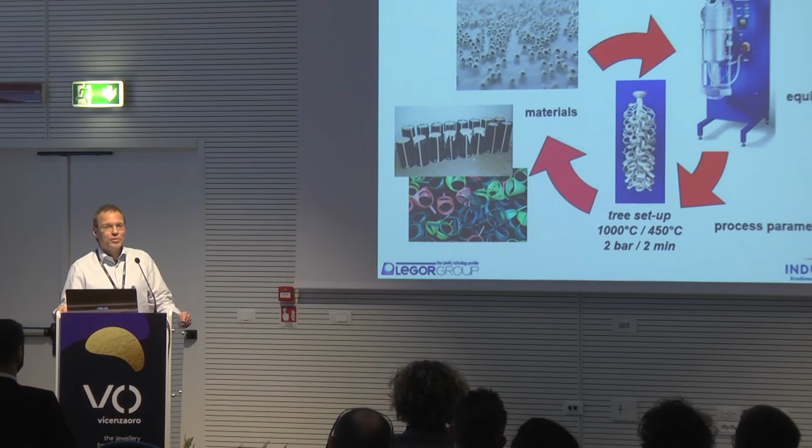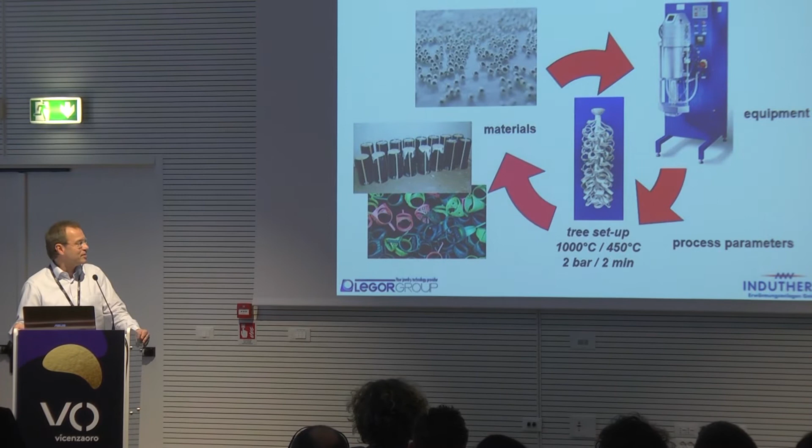The complexity of the casting process is well known, I guess. It starts with the materials that we use - the waxes, the investment material, the alloy. We put it in a casting equipment and run the process using a set of process parameters. All these aspects interact with each other in a complicated way during the casting process, so chasing the source of defects is not always so easy - which is what we have to do if we want to be economic and increase the quality of our products.

Now we will entirely focus on porosity, and it's about differentiating between different types of porosity. If you want to avoid porosity, you must identify different types of porosity. You must understand the characteristics of them and the major reasons before you can tackle them and try to avoid them in the daily routine. So this will be the sequence that we will follow.

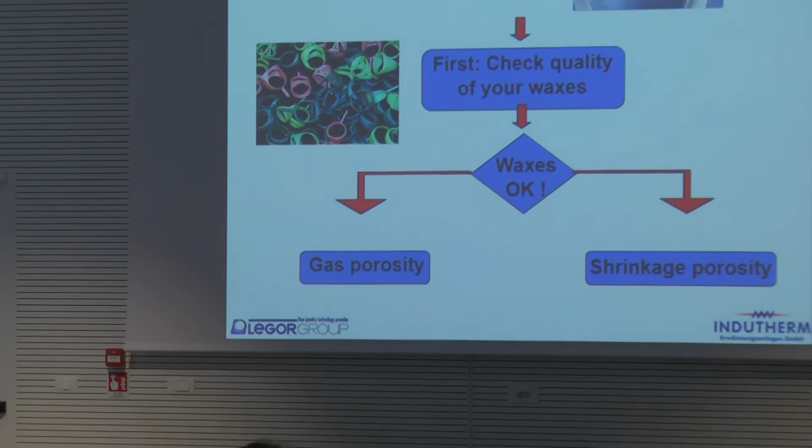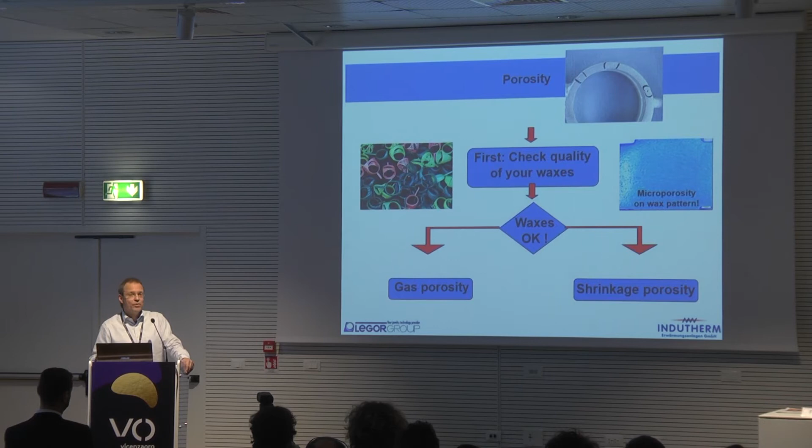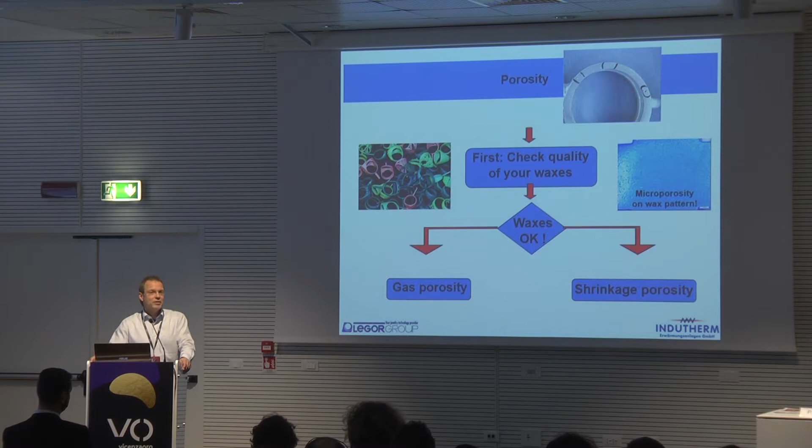First of all, a general comment: if we talk about porosity and pinholes on an as-cast surface, in many cases we can trace them back to wax defects. So the first recommendation will always be - if you have issues with porosity or pinholes on your surface, check the quality of the wax. In many cases we can find porosity already on the waxes - it can be micro pores, as seen on this photo, it can be bigger pores. Also resins that are now generated by the printers out there can have defects. So check the quality of these items before you go into the casting process later on.

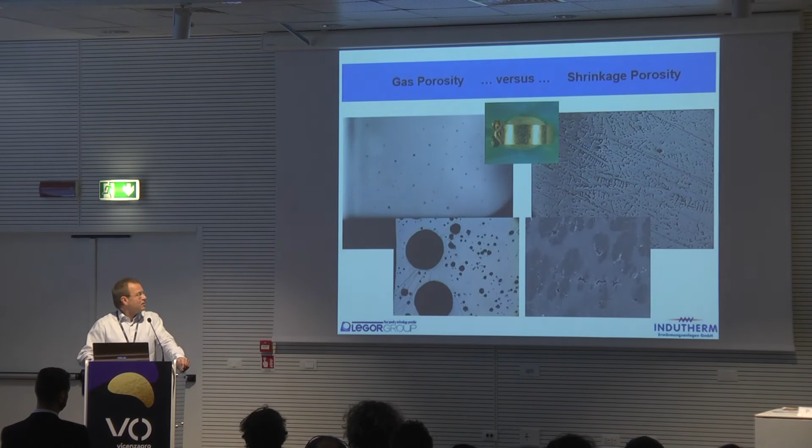Differentiating between two main types of porosity is important. In general, we have two different types: gas porosity characterized by spherical pores, and irregular shaped pores like on the photos on the right side, which we refer to as shrinkage porosity. These are the main two types of porosity that we can find. They will interact and overlap in the real world, but it's good to differentiate them clearly here for today.

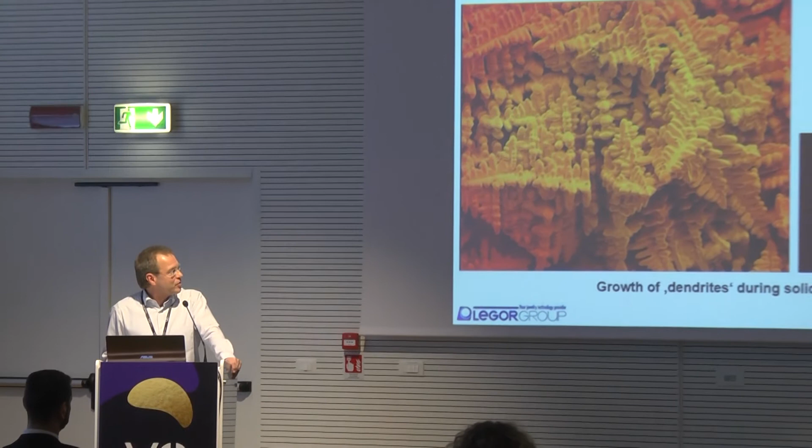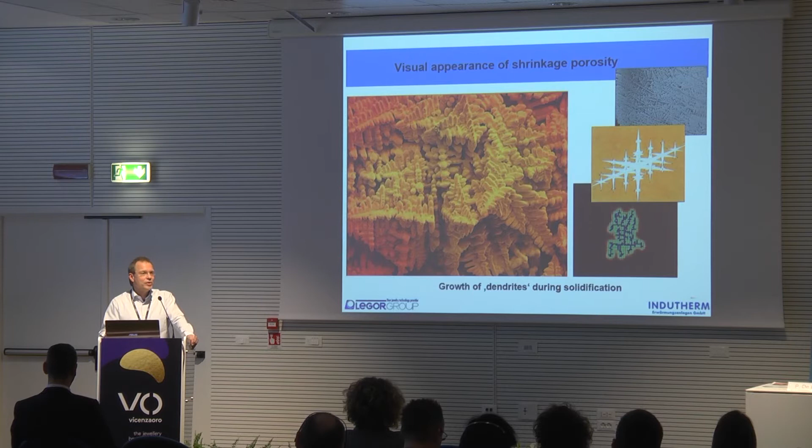In jewelry casting, the porosity will be distributed in a different way, or in any casting process that involves more complex solidification processes. So the irregular shape that we see in shrinkage porosity items is related to the way the crystals grow, like the branches of the tree that you can see here on this photo. When these branches of the crystals grow, the metal shrinks in volume and you will have voids. And if metal can feed these voids, then porosity can be avoided. But if this doesn't work well, as we can see on the right-hand side of the picture...

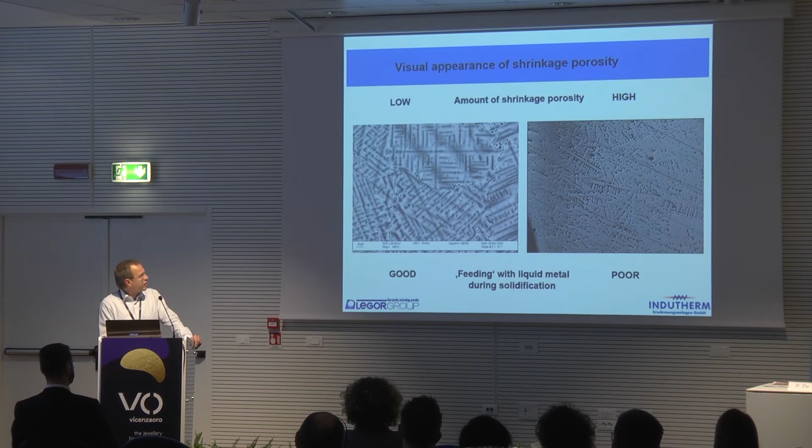If this feeding of these voids doesn't work well, these voids will remain, and we have these typical irregular shaped pores, shrinkage pores. On the left side, you see a micrograph where the microstructure has been etched. We can see also these crystals here. Yes, you can see some microvoids here, but all in all, the feeding went better than on the right side, and we can avoid shrinkage porosity.

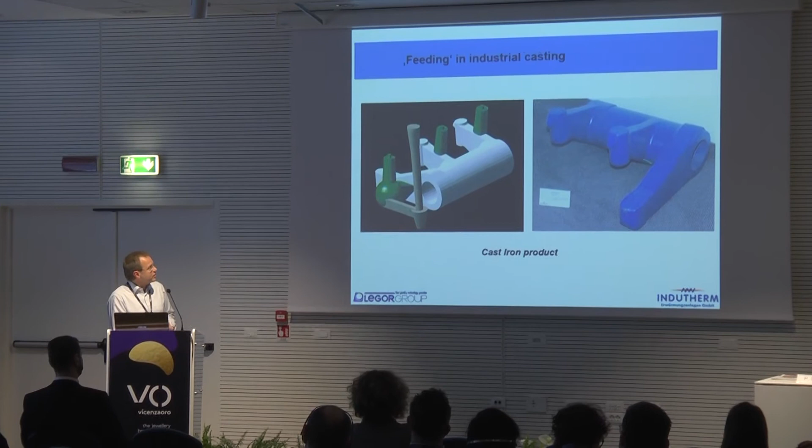So how is this done in practice? In industrial castings, like you can see here, this is the cast that's going to be cast. You see these green items here. These are feeders that are put on typical sections of the cast part, and they will supply molten metal to the casting and feed the casting with liquid metal during all the process to avoid shrinkage porosity.

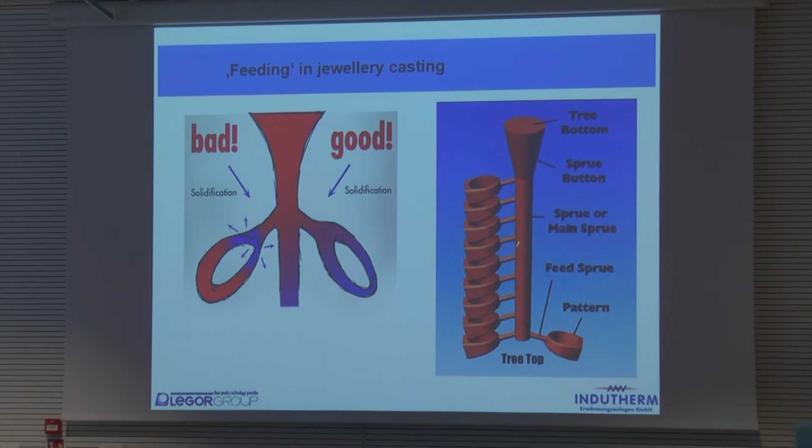In our jewelry casting, how does this work? We have a main sprue and we have gates or feed sprues. The task of these parts of the casting is to supply the molten metal during the filling process. The second task is to feed the solidifying part during the solidification process in order to avoid or minimize shrinkage porosity. So the way of sprueing is very important.

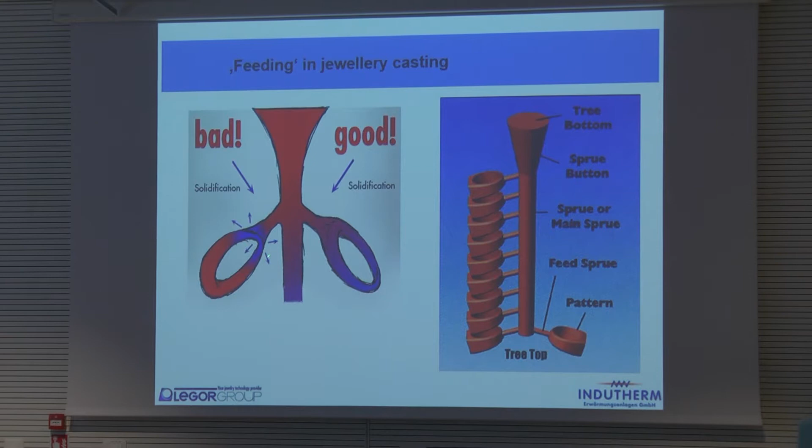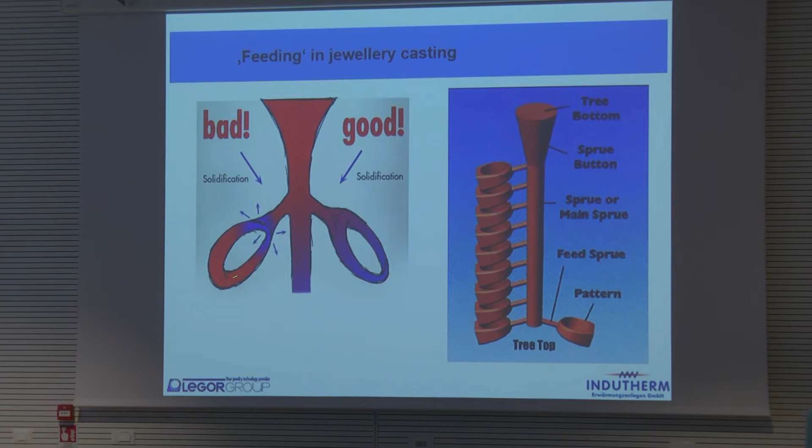Here's just a very generic example. We have a ring and we have a heavy part of the ring here. We put the sprue on the opposite side, and this asks for problem. So this part of the casting may solidify first before the rest of the casting. So when this is solidified, no molten metal can be fed into the other part of the casting. So this will ask for shrinkage porosity in this part of the ring.

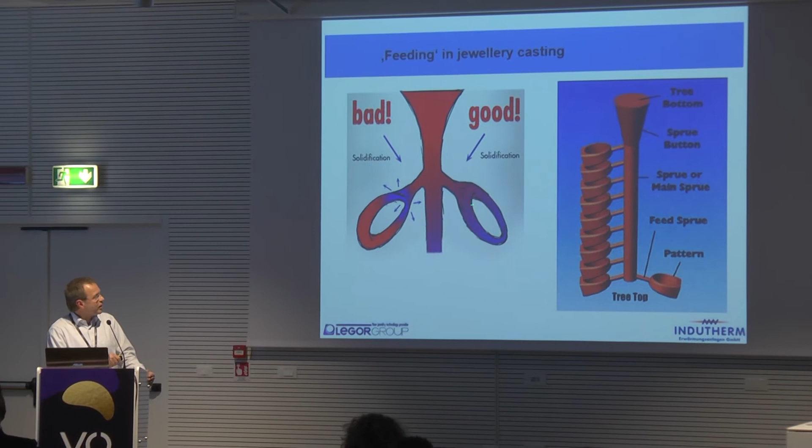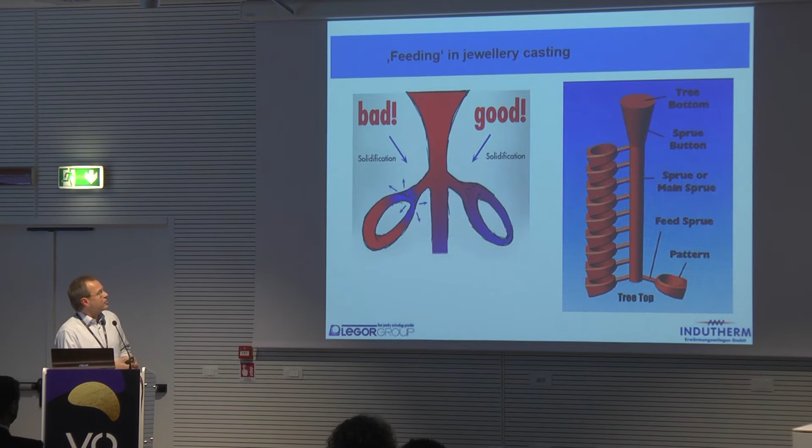Just opposite, if we put the sprue on the more heavy part of the ring, solidification will start here and progress entirely into around the ring shank. So this will allow molten metal to feed the solidifying part of the ring and will minimize, or in the best case, avoid shrinkage porosity.

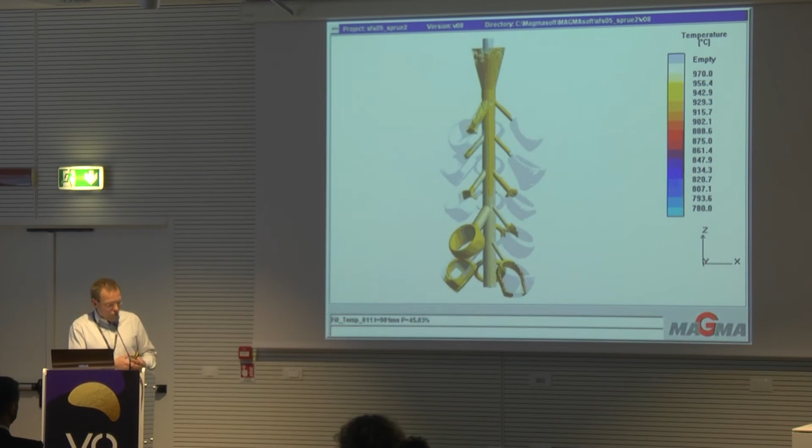Many years ago we focused a lot on computer simulation. So you can see a video here. Let me stop it, yes. So now you've seen molten metal pouring inside. The tree and the parts have completely filled. You can see a temperature scale here, and the metal will start to solidify around 900 degrees. This is an example for sterling silver, and will solidify around 780 degrees.

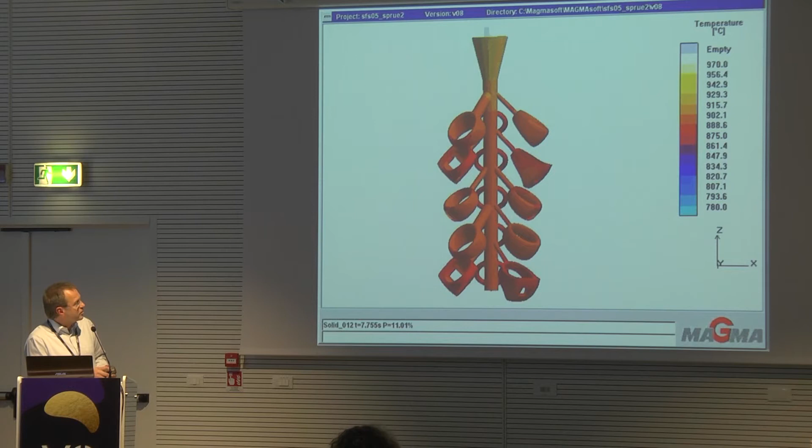If you let the video run, you can focus on some particular points of this simulation video. For example, on this ring here, where we have a tiny sprue opposite to the more heavy section of the ring. I don't know if you can clearly see it now with the illumination that we have here in the room, but you will be able to see that this part will get cold now, so this will ask for shrinkage porosity in this area.

Now, just opposite to that, if you have the sprue thicker, bigger, and more positioned on the heavy side of the ring, this will work much better. Solidification will progress in this way, and this will be the best case to avoid shrinkage porosity.

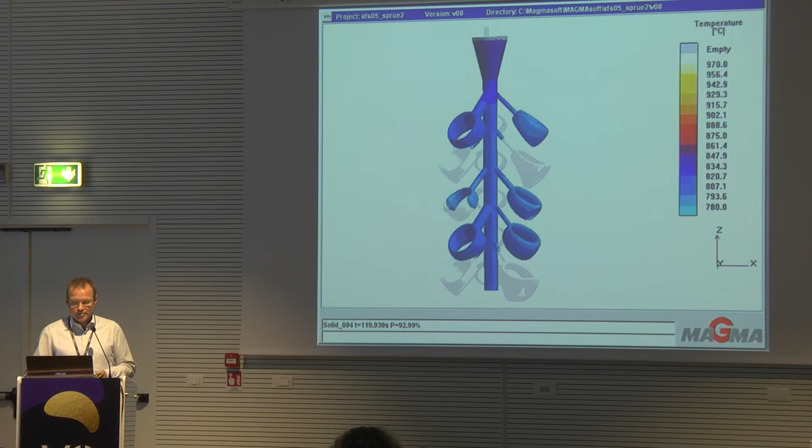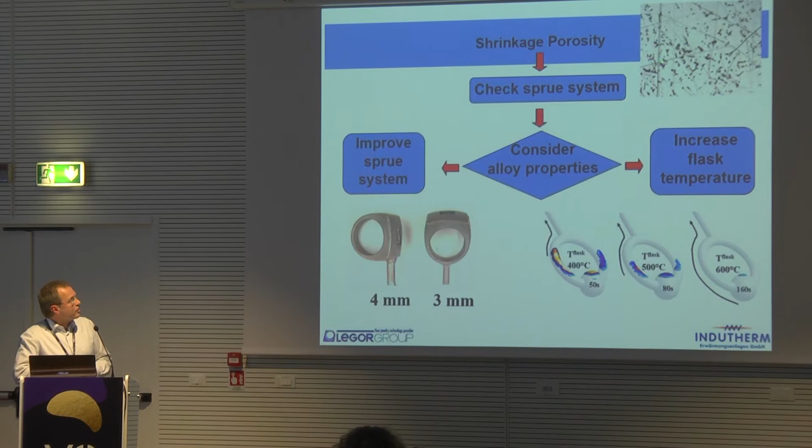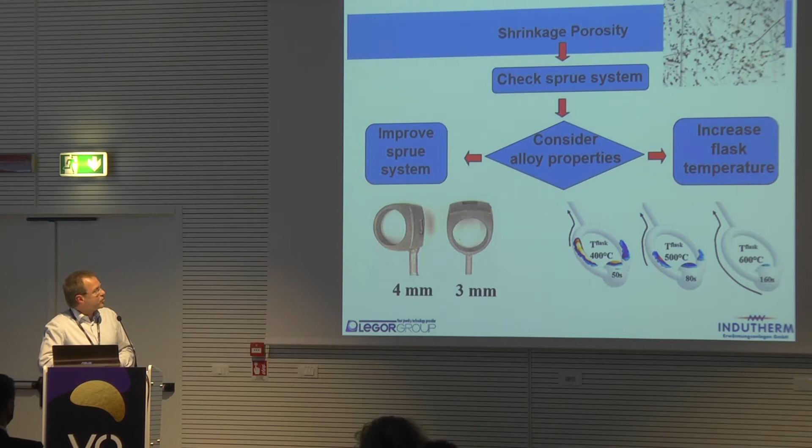So just a guideline, check the sprue system if you can identify shrinkage porosity on the polished surface. Think about the alloy properties - some alloys are more prone to shrinkage porosities than others. Typically, sterling silver is less prone to shrinkage porosity than most gold alloys. Within the gold alloys, the higher melting ones, palladium white golds, are more susceptible to shrinkage porosity. And then the very high melting alloys, platinum or palladium based, are even more critical.

So what can you do? First of all, the best option always is to improve the sprue system. So as opposed to put a tiny sprue opposite to the heavy part of a casting, put a bigger one more near to the heavy part. And this, in most cases, will help to minimize the problem.

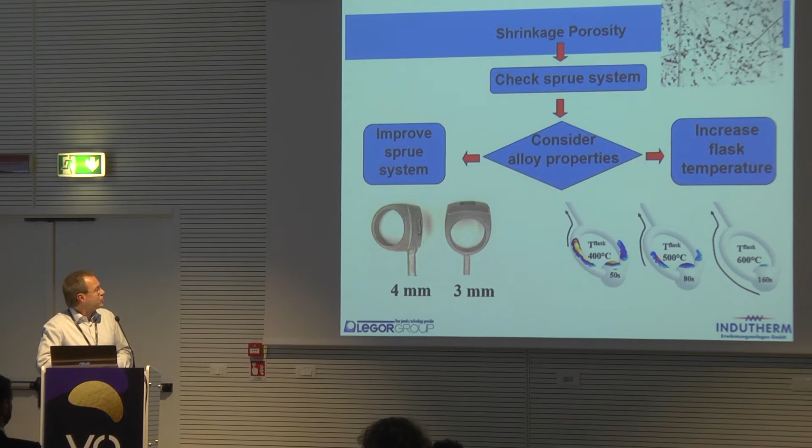The more susceptible the alloy is to shrinkage porosity, the bigger the sprues will become, the shorter they will become, and in extreme cases, we will also use multiple sprues to optimize the situation.

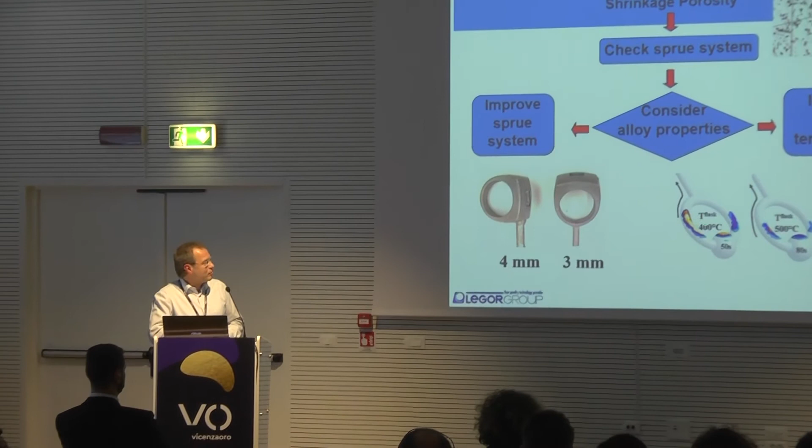Another option can be to increase flask temperature. This is again a result from computer simulation, where we ask the program to simulate the porosity in the casting. You can see a test item here with a heavy section and the feed sprue attached opposite to the heavy section. At a low flask temperature, the simulation, and reality will confirm that, will reveal shrinkage porosity on typical locations. And if we increase flask temperature, the situation will improve.

This is the other way to approach the problem, but you have to be very careful because higher process temperatures are not always the right solution, as we will see in the next minutes. Give me a second.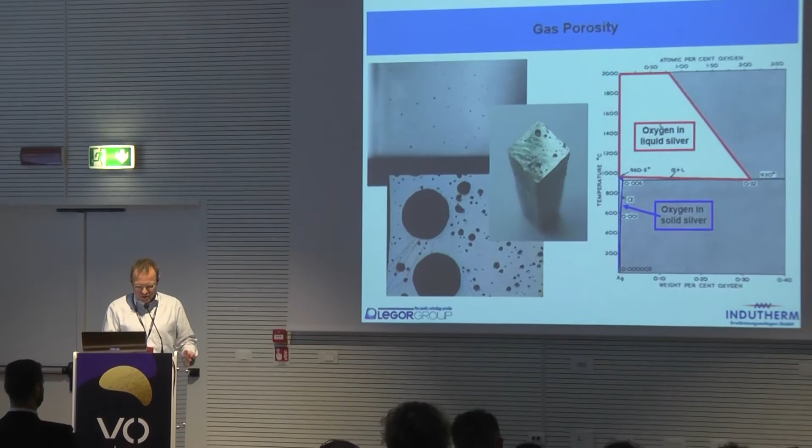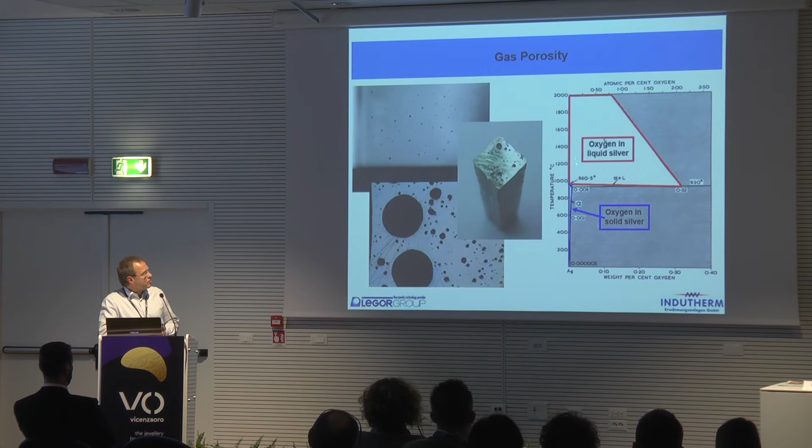We're already coming to the second type of porosity that I want to talk about, namely gas porosity. Again, sterling silver is a good example here because it's very prone to gas porosity. Why? Like all molten metals, you can dissolve a lot of oxygen in the molten metal at high temperatures. This is indicated here by this diagram where you can see the amount of dissolved oxygen as a function of temperature. So in this part here, we are above liquidus temperature of pure silver in this case.

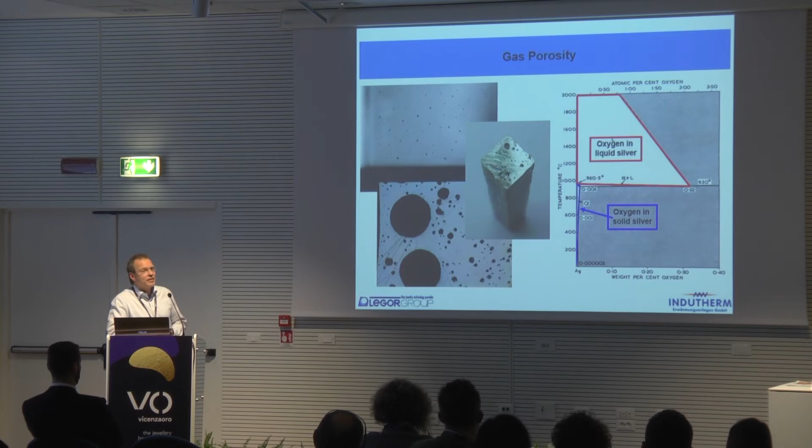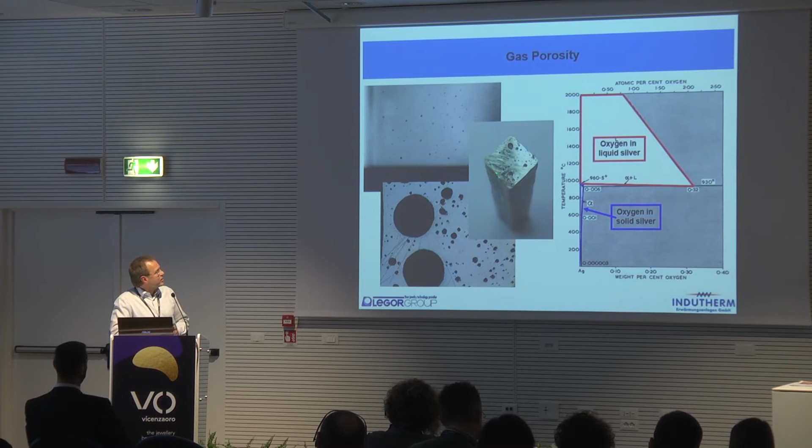This area here indicates the amount of oxygen that we can dissolve in the molten metal. As opposed to that, when the metal solidifies, this small area here indicates the small amount of oxygen that we can dissolve actually in the solidified metal. So what is happening with the oxygen when the metal solidifies? You can see it on this ingot here. The gas tries to escape, and we form typically spherical gas pores.

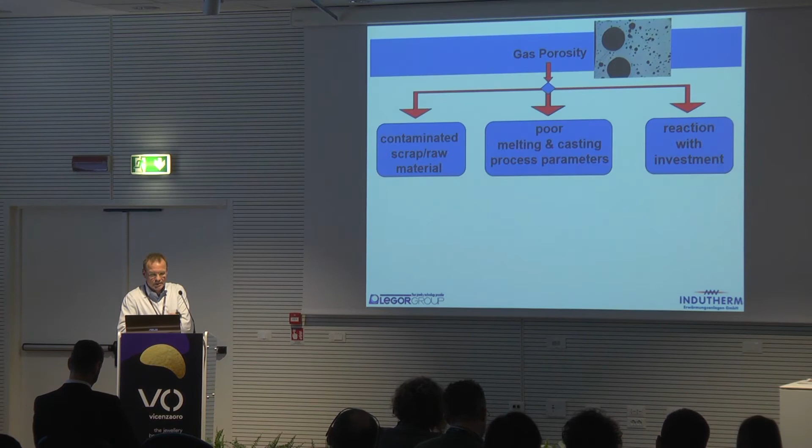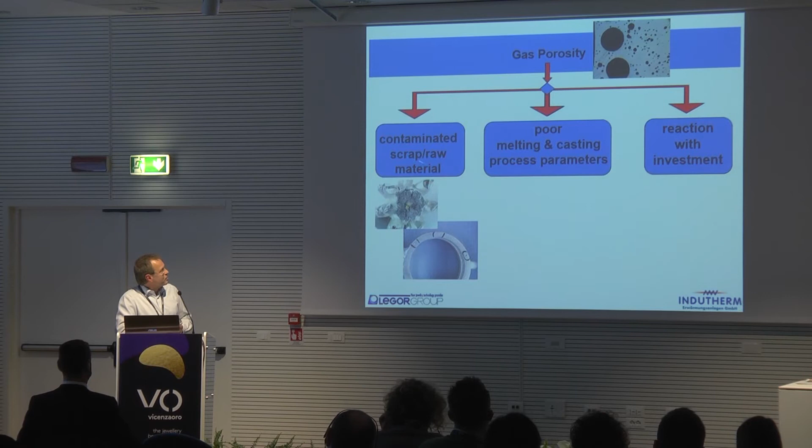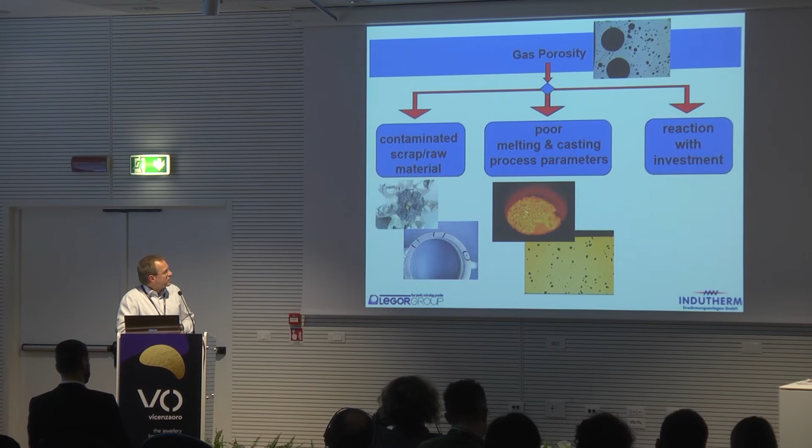How can we try to avoid this? There are basically three categories we will quickly talk about. Contamination of scrap and raw material is a typical reason for gas porosity. Poor melting and casting process parameters is a second typical reason, and reaction with the investment is a main third reason for gas porosity.

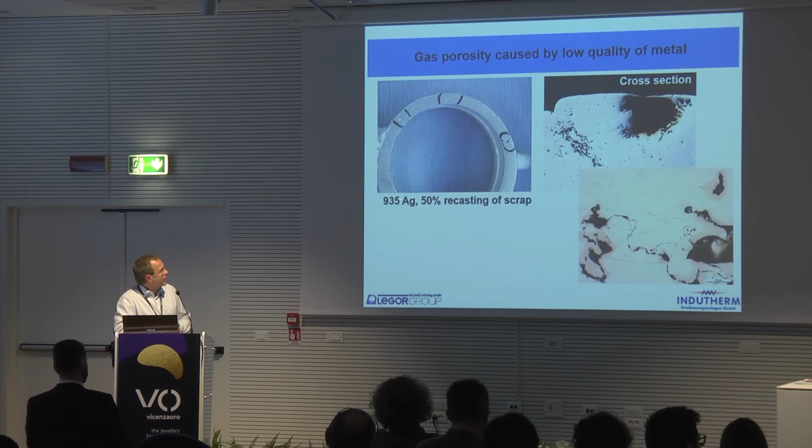Going quickly through these three different options that we want to talk about. Again, a case study here with some big gas pores on a ring shank for sterling silver. If you look with analytical equipment, with a microscope on microsections, we can look into the nature of the defects, and in this case we can see a lot of impurities, oxides, near to these gas pores. So very probably in this case, the defect was caused by the usage of contaminated scrap material.

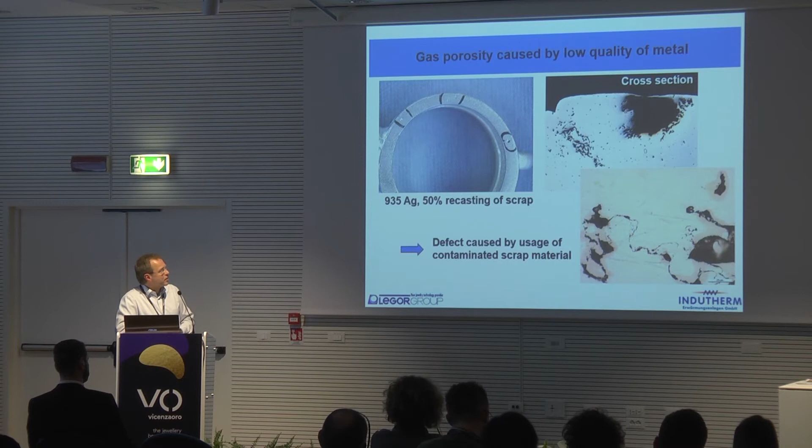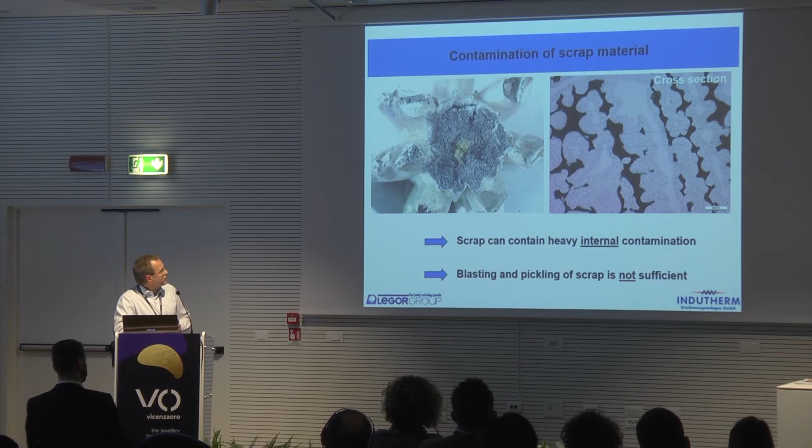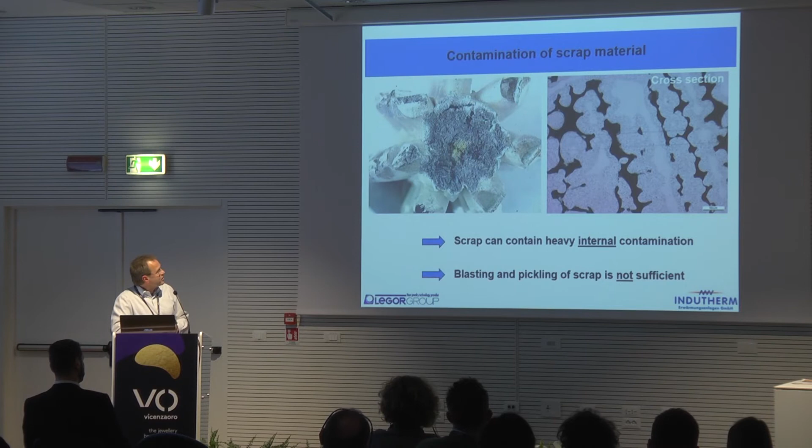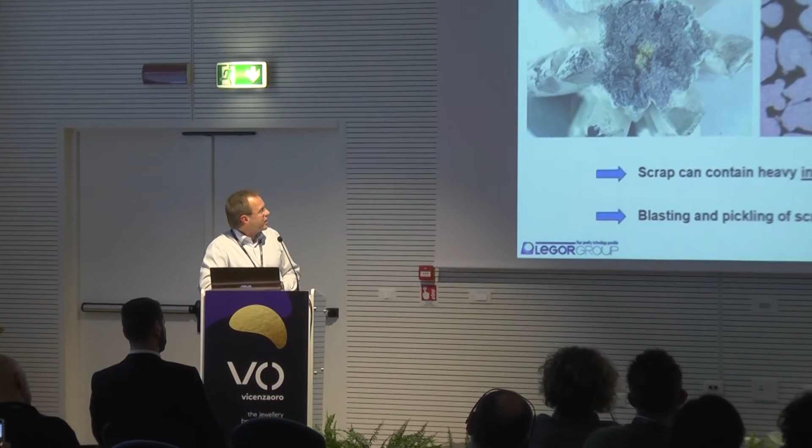Scrap material - I don't know if you can clearly see it on this photo here. This is a tree that has been pickled after casting, where the as-cast items were chopped off here. So these are the remainders of the feed sprues, and the surface of the tree looks shiny because the tree has been pickled. But if we broke up the tree and looked inside the main sprue, you can still see a lot of contamination, dark colors here. So the pickle is not sufficient to clean the sprue after casting. It's an important step, but it's not enough to just pickle the tree or blast it.

So cleaning the scrap is important. We'll always start with the blasting, pickling, and tumbling process so that the sprues are shiny and look clean, but then the recommendation always is to go into a regranulation step, which involves remelting and degassing of the metal, and that will help to reduce the amount of gas that may be dissolved in the scrap material.

It's a process that can be done on dedicated equipment, like a granulation equipment. It can also be done right before the casting process in a casting machine. Typically what we recommend is to increase the temperature 50 or 100 degrees C above the typical casting temperature.

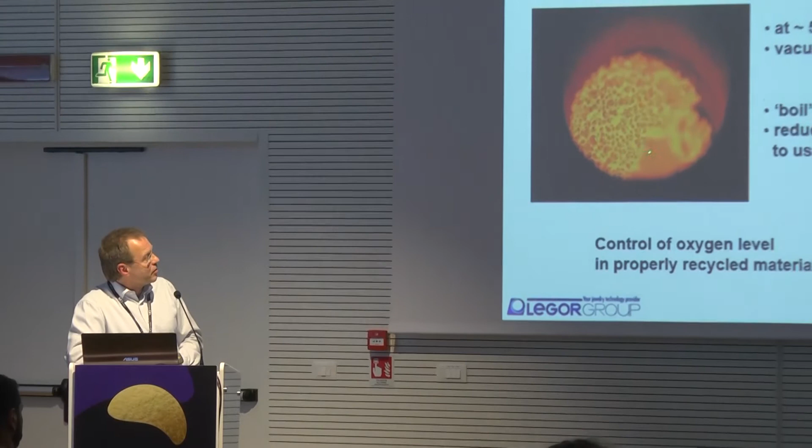The graphite crucible will generate an atmosphere that will take out the dissolved oxygen from the molten metal. Applying a vacuum or an even more reducing atmosphere can also be done on certain types of equipment. We will observe the melt and see the gas bubbling out. Then we can reduce it once the melt is quiet and go to a usual casting or graining temperature.

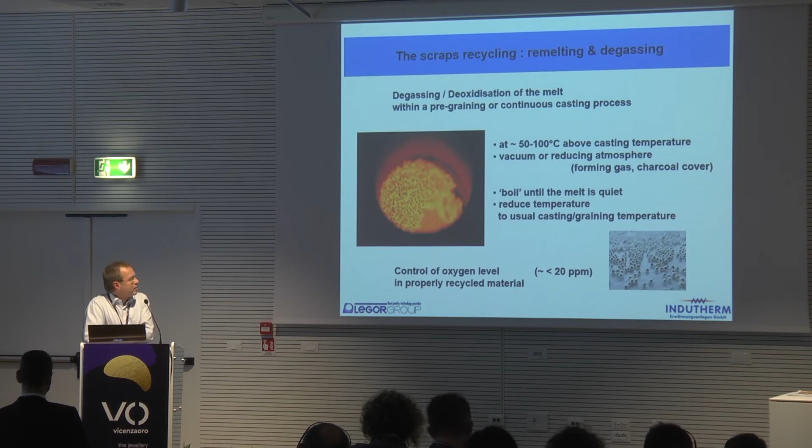So a low oxygen level can be obtained also for properly recycled material, and that will translate greatly into improved quality of the casting.

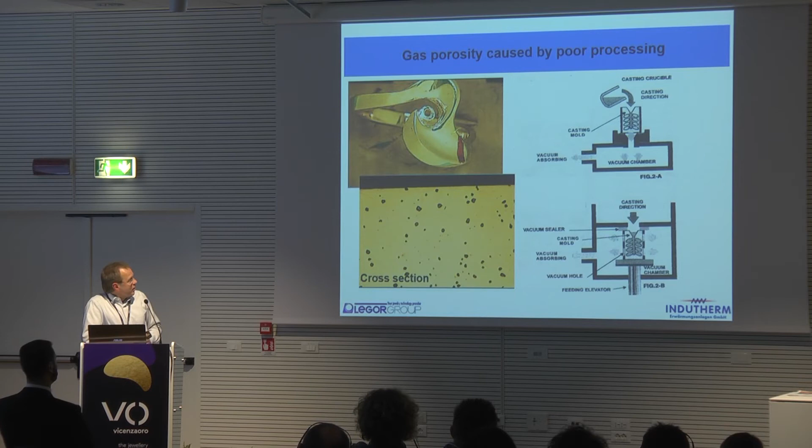Poor processing can be another topic during the casting process. Here is an example for, I think it's 18 karat gold, some pinholes here on the surface.

We don't want to blame all defects always on poor equipment, but there's a lot of old equipment still outside where we have open melting processes, where the flask is not in a protective atmosphere, or even if it is, we may still have an open melting process on top.

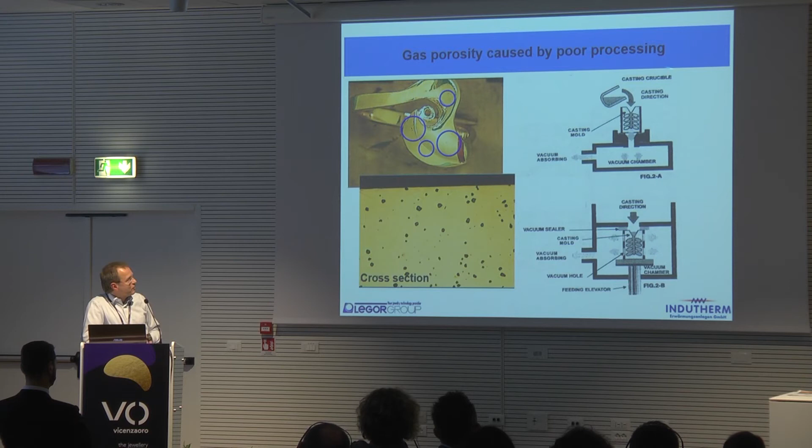Nowadays, we usually work with closed chamber machines where we have protection of the melt in a closed chamber where we can work with protective gas and vacuum. And of course, we have a closed flask chamber where we can also work with protective gas and vacuum to maintain a very clean, oxygen-free atmosphere during the melting and pouring process.

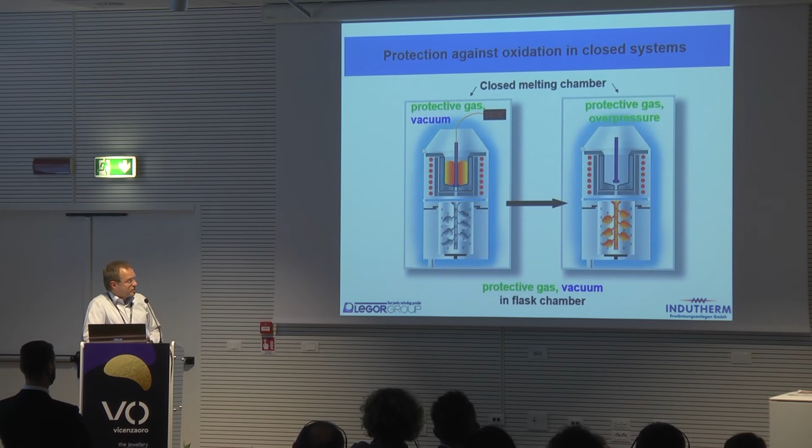We can differentiate between 3 different subsequent process steps in the casting process. First, the melting phase, then the pouring phase itself, where we have to load the flask at a certain point, and then after pouring, when the stopper rod has been lifted and the melt has poured into the mold, we have the cooling phase of the flask, and we have to take out the flask at a certain time.

So just very quickly, to focus on these 2 steps which are sometimes not given enough importance: when do we load the flask into the machine? When we take it from the furnace, it's full of air.

We should put it into the machine early enough to allow the atmosphere to be cleaned, to really take out all the air from the mold. If this is done early enough, like 1 or 2 minutes before pouring, then this is usually sufficient.

Casters are sometimes afraid of the drop in temperature by waiting so long with the flask in the machine, but we can tell, by many measurements on the flasks, that this effect is really minimum, and the benefit instead is that we have a clean atmosphere in the flask before we pour.

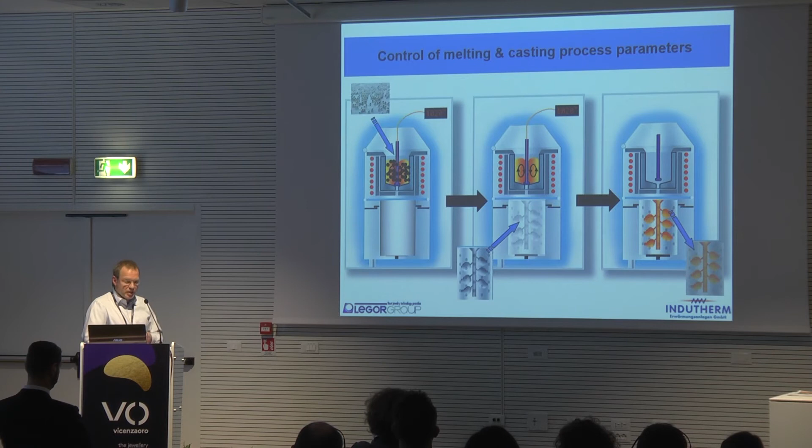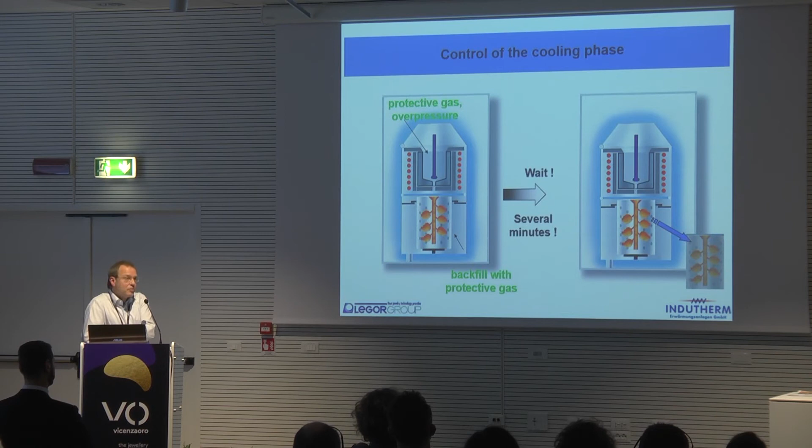Just the same, after casting, we should not take out the flask immediately from the machine in order to accelerate the process. It will greatly improve casting quality if we wait and keep the flask inside the machine for a while before taking it out, benefiting from the good atmosphere we have in the machine. So up to several minutes can be helpful, even if it means maybe fewer flasks per hour.

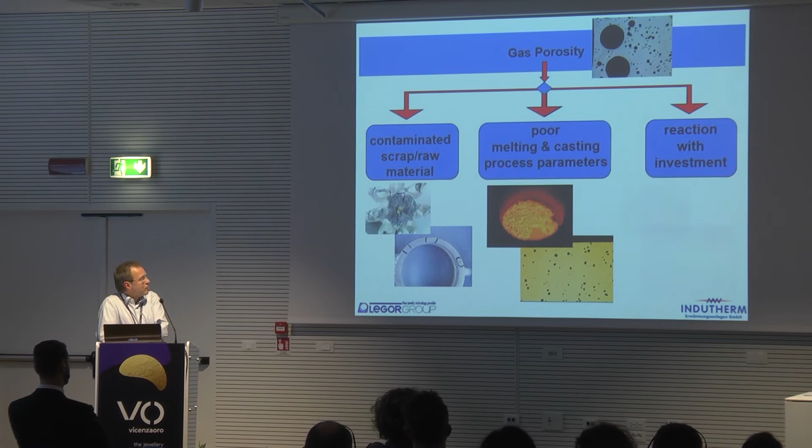So we have already talked now about these 2 aspects. I have a third one I want to talk about now: a reaction with investment.

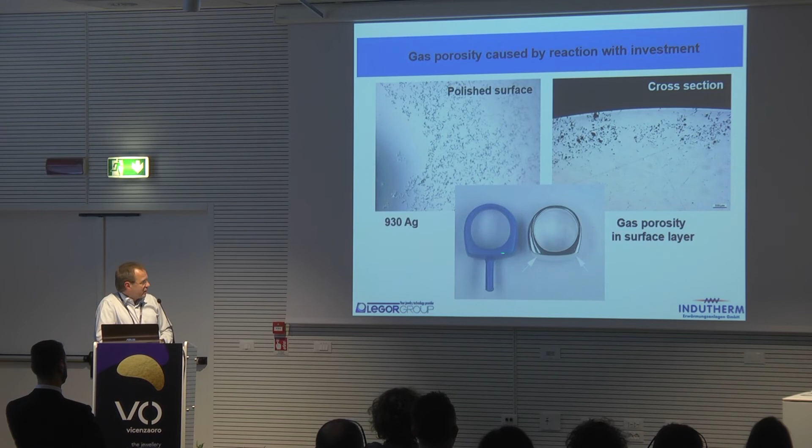Now, this is a case study here where we observed on the surface, or also on the cross-section, more irregular shaped pores, where we could probably think that this is shrinkage porosity. However, the item was not particularly badly sprued, so we would not necessarily expect shrinkage porosity in these areas.

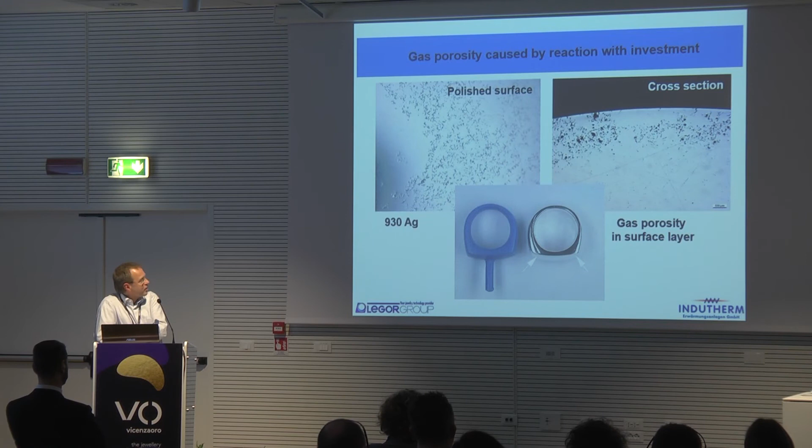And indeed, if we look closer, especially on a microsection, we can see that the porosity focuses or localizes on the surface-near area and also contains some spherical pores. So this is a typical feature of gas porosity caused by reaction with investment.

I have another video here running. It's actually a cross-section through a flask where we have seen molten metal pouring into the mold, and I have to restart it because it was really too fast.

So it's a cross-section in a simulation through the flask. This is part of the main sprue. This is the feed sprue. This is the item that we cast.

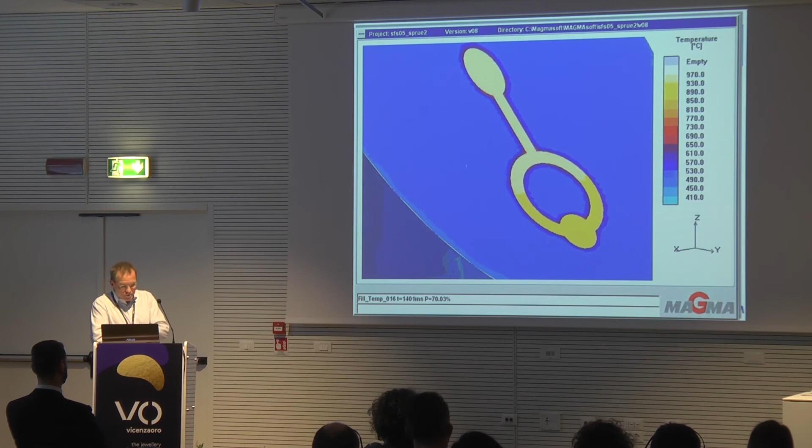If we let the metal flow inside, you can see everything here is at high temperature now, about the pouring temperature, and the blue color here is the investment material that surrounds the as-cast part. If I let the video run, you can see temperature increasing a lot in the surrounding of the as-cast part, especially in areas where heat dissipation is restricted. The flask, the investment material, can become very high in temperature in the direct surrounding of the casting.

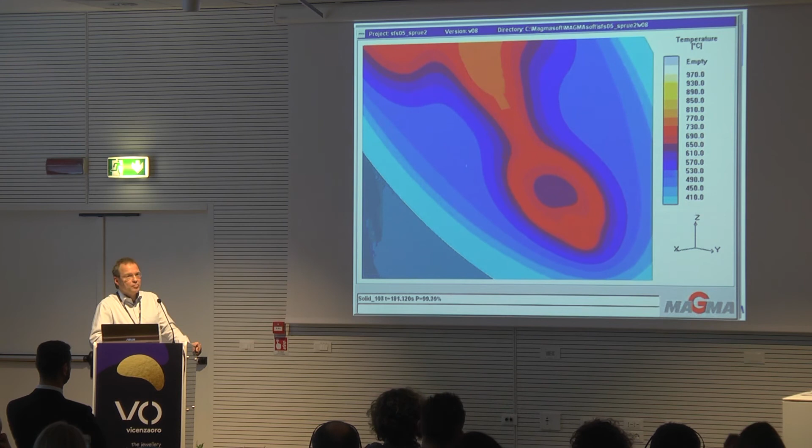The investment material is only stable up to a certain temperature. It will also depend on the metal properties, whether the metal is reactive with the investment or not. But in many cases, we can trace gas porosity back to reactions with the investment caused by decomposition of the investment material. It releases gas, it's oxide material. If decomposed, oxide or oxygen will diffuse into the molten metal, especially in the surface-near regions. This will create gas porosity caused by reaction with investment.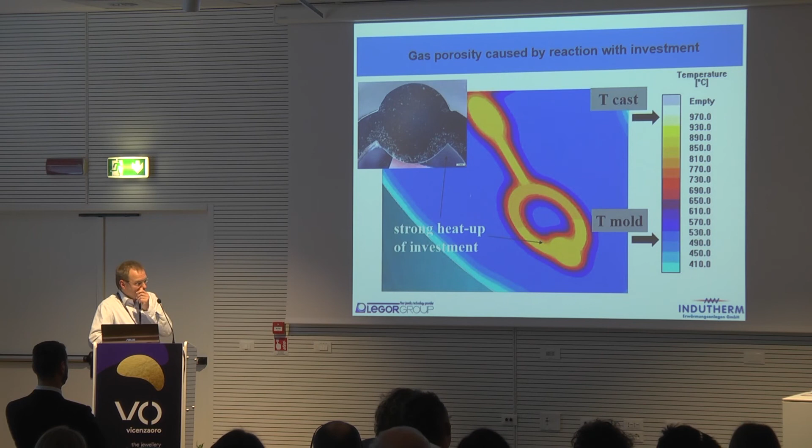High process temperatures are not always the only reason for this type of defect. We have to control the investment material that we use. Investment beyond shelf life can contribute to the problem. A poor burnout process can contribute to the problem. Temperature control of the burnout oven can be an issue. So there are several aspects that have to be kept in mind in relation to this defect.

As a general rule, I want to close with two extreme cases here. When we cast filigree items, lightweight parts, we typically use high or medium to high flask temperatures. If we pour into molds at high flask temperature, there's always a risk for reaction with investment. But if we want to fill the parts, then there's no way out. We have to do that.

The risk for reacting with the investment will be, in this case, low, because the volume of the more filigree parts is not so high. So the heat up of the investment will be less. In this case, going to medium to high flask temperatures is mandatory.

We have to obtain the fill first of all, and then we have to look at the quality of the surface. And yes, we can improve the fill process by putting overpressure in the melting chamber to assist the fill, to push the metal into the cavities of the mold to obtain optimum fill.

We can also assist by putting a vacuum in the upper chamber, which will effectively evacuate the mold too, from the inside and from the top chamber and from the flask chamber, and that will also allow the metal to better fill the mold. So this is a set of process parameters that we will obtain if we go to cast very filigree items.

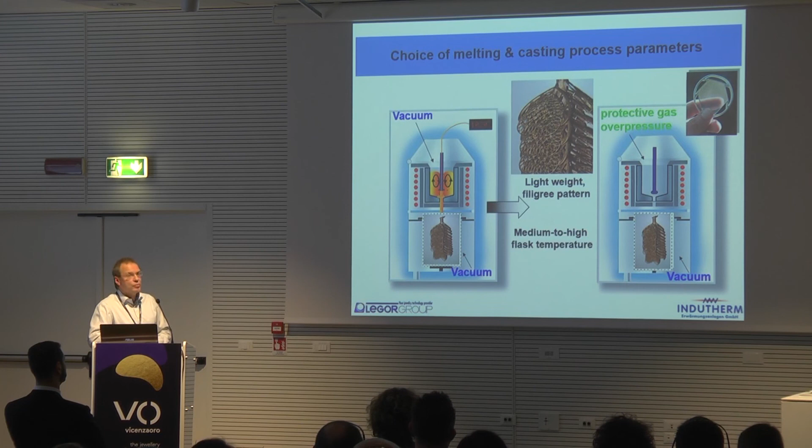If, opposed to that, we cast more heavy parts, we have to be more careful. More heavy parts will be more prone to gas porosity caused by reaction with the investment. So it's always a good idea not to exaggerate, not to put a vacuum also in the upper chamber here. We will just maintain an ambient pressure in the melting chamber.

This will create only a partial vacuum in the inside of the mold. So when the metal pours in, the metal flow will be more gentle. There will be a back pressure on the molten metal when it is pouring inside the mold. This will reduce turbulences, and it will lead to less reaction with investment. In combination with a low flask temperature, this is a good idea to avoid reaction with investment.

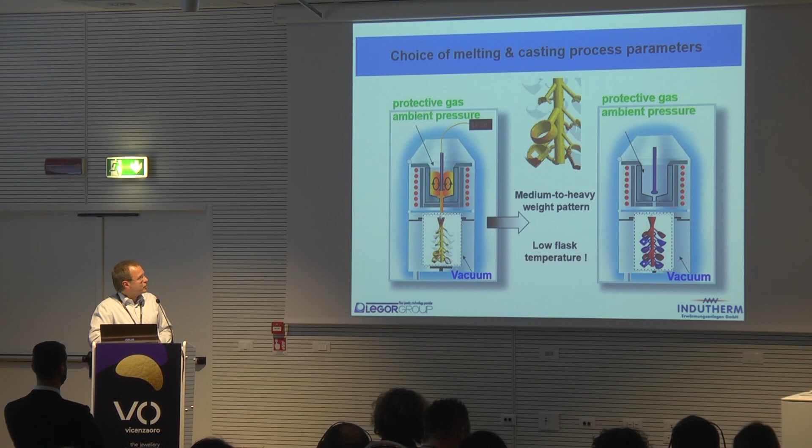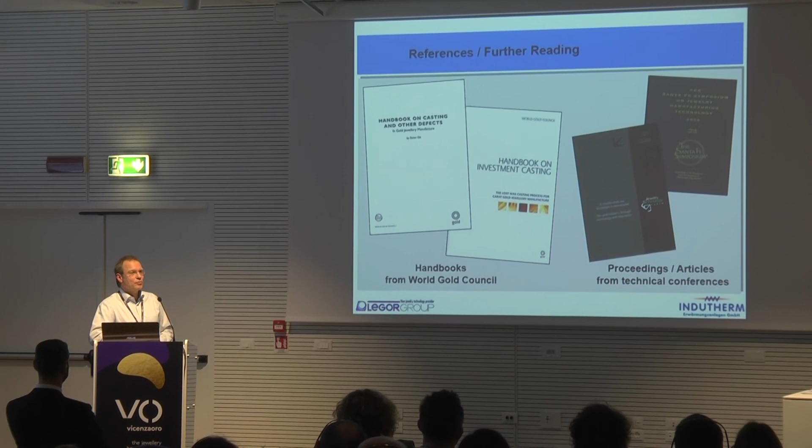So I'm already coming to the end. Again, this was training material. Sometimes it's just good to go back to the basics before thinking about innovation. So there's a lot of publications outside summarizing these and other parts that we should sometimes remember.

JTF proceedings were already mentioned by Massimo earlier, so they are available online. We have proceedings from the Santa Fe Symposium over, I don't know how many, twenty-something years by now. So there's a lot of literature out there where you can go back to the basics and, of course, back to research. There are handbooks on investment casting and casting defects published by the World Gold Council. So a lot of useful material is out there that many of us should refer to in our daily practice and routine in order to avoid defects, improve quality, and reduce costs. Thank you very much.